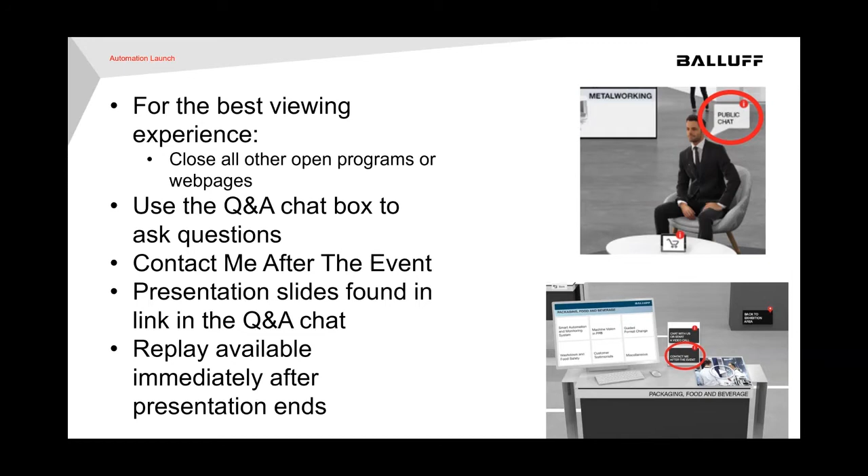Our presenters today are Wolfgang Kratzenberg and Logan Welch. Wolfgang is Balluff's technical sales specialist for RFID and traceability. Wolfgang has worked at Balluff for 8 years. He is an experienced sales and marketing specialist focused on RFID and barcode technology. Wolfgang assists in every phase of a traceability project, from idea to implementation. He has a passion for making a complex concept easier to understand and is focused on helping clients achieve their organizational objectives.

Our other presenter is Logan Welch, and Logan is Balluff's machine vision technical sales specialist. Logan Welch has more than 20 years of experience in industrial electricity, factory floor automation, automation sales, renewable energy design, and machine vision. He has held roles as a controls engineer, a territory vision/ID sales manager, and an engineering manager, among others, prior to joining Balluff's vision team. Logan prides himself on being a collaborative resource in any role he is in, and he is always passionate when talking about the benefits of Balluff's vision solutions.

Without further ado, I'm going to turn it over to Wolfgang, and then we'll get to Logan to finish the discussion. Please enjoy Driven by Data, the role of RFID and machine vision in assembly and production.

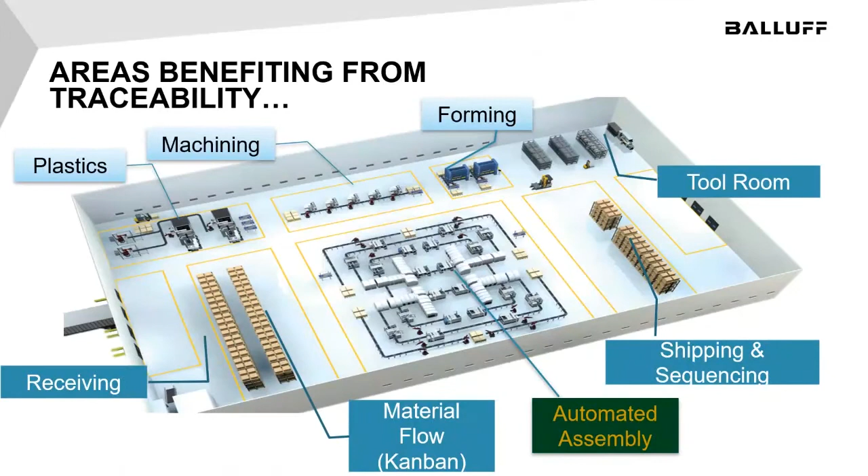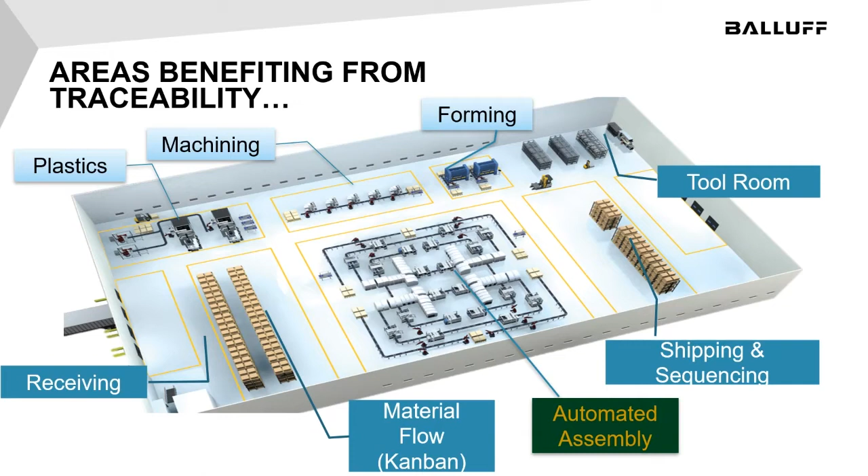And that's where it can get a little bit confusing, but realistically, once you hammer it all out, it's pretty straightforward and logical. So let's jump in here. So, you know, all the areas of a plant, and this could be any plant. This could be anything from an automotive plant to, you know, insert any industry plant here along the way. But for sure, a vertically integrated plant in one setting.

So let's just go across the top. You think about injection molding machines, anything in the plastics world, two-shot molding as well, machining centers, metal forming, meaning stamping, and then even when you put the tools away in the tool room, you have a location where the tools go when they're not in use. RFID has a role in all those areas.

And where would it play in the injection molding world? A mold is just a tool, right? Some tools are very small, some tools are very large. In this case, most injection molds are fairly large, and then the inserts that go into them are fairly small. But all of those things need to be tracked. And it's not just that they need to be tracked, but what information can you put on the tag, which goes on the mold itself, that can help you make decisions in the future.

And that's the key. Things like how many shots, that's a huge one in the injection molding world. In the machining world it's how much tool life a tool has left on it, right? So if I have a milling tool in there and I require 3 hours of work for that tool and it only has an hour rated of work life left, then I probably shouldn't be using that tool. I should go find one that has a longer life than 3 hours.

Metal forming, you think about these gigantic dies that go into very large presses. I've seen some big monsters out there, and what guys are doing is they'll put the tag on the actual die itself, and first and foremost, they're trying to make sure that they have the right die and the right press. You wouldn't believe how many times, or maybe you would, the wrong die gets put in for the wrong application, and shut height is off and all that. And what happens when that occurs is you have a crash, and a crash in a 600-ton press is something to reckon with.

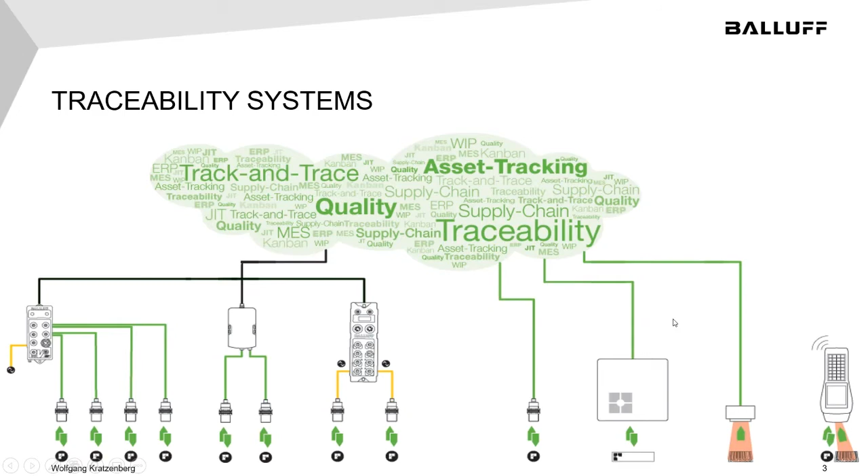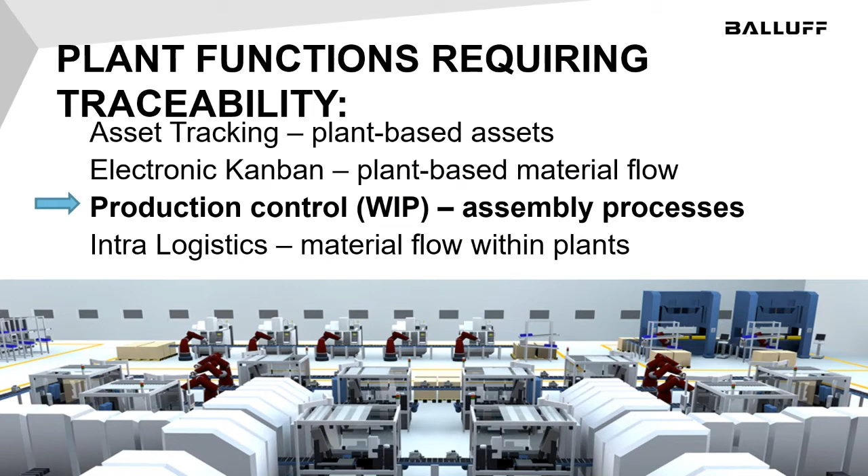And then, of course, there's barcode reading, and there's handheld barcode and RFID reading as well. So we're going to get into all this a little bit later here. So 4 major applications within a manufacturing plant, and it really just doesn't matter. Again, it can be manufacturing a vehicle, wafers for semiconductor, or medical devices for life sciences. Really, all of these things come into play.

There's always asset tracking, and these are plant-based assets. I'm not talking about your IT equipment and that kind of thing. We're talking about things that are required to build the product. What are the tools that are required? What are the change parts that are required when you do a changeover, when you change from making one part to another? Those are the assets that you need to be able to identify and locate when you need them.

RFID plays a major role in there, and it's no different than Kanban. Kanban actually comes from the automotive industry, but it's also used in just about every other industry out there, because at some point along the production line, if an operator stocks out of a part, you have to have a way to get it down to that operator so he can continue to build those parts. And then the one we're going to talk about mainly is production control. We'll go through that here shortly.

But another big one nowadays is intralogistics. A lot of people, when they think of RFID, they think of tracking shipping containers across the seas and stuff like that. But realistically, the major way that RFID is being used, more than most use cases, is tracking material. And this goes back to what I was saying about the raw materials as they come into a plant. Tracking those raw materials from start to finish.

Again, I need to know where that raw material is when I need it, because otherwise it's going to slow me down. And again, downtime is not a good thing. That's exactly what we're trying to eliminate in a production process.

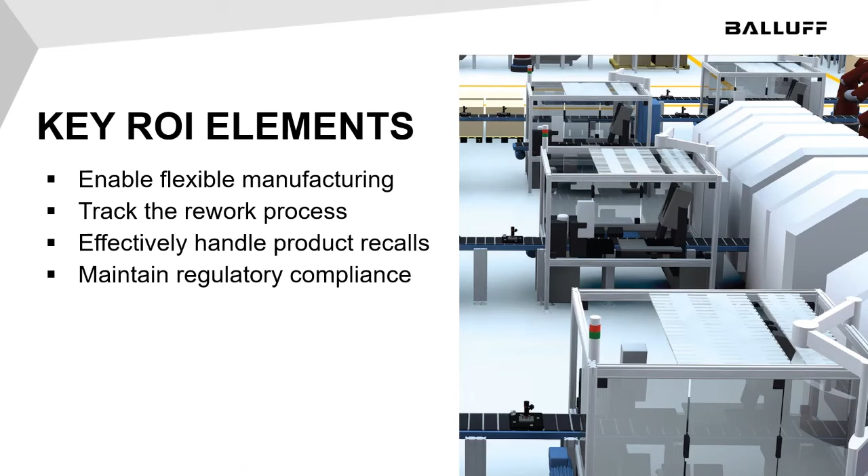And again, a big part of this is also maintaining regulatory compliance, making sure that I have traceability. I can say this is where this product started, this is where this product is, and this is where this product is going. That's the whole concept. RFID, barcode, and machine vision allow you to answer all those questions. It allows you to record that data, and you have a record of it in case you need to show that record.

So this is what I was really talking about before. Everybody knows we should be driven by data, right? It doesn't matter if it's in our personal lives or anything else. As smart humans, we need to make decisions based on real, reliable data. That goes without saying, I think. But so what is the data? What kind of data is being written to an RFID tag?

In some cases, people think, well, I write a 4-digit number on there, and that gives me full traceability. I scrub it against a database. It tells me exactly what that product is, et cetera. That's fine, and that's absolutely a way to establish traceability, and that's usually an entry-level way to do it. But because of our tag size, and because of how RFID in general has evolved, especially over the last decade, we have the ability to write a ton of information to these RFID tags.

And the question that constantly gets asked of me is, what are people writing to the tag? Because, like I said before, there's an evolution happening where it's not just barcode or RFID, it's a combination of both. The people who are familiar with barcode understand that you're just reading a few-digit number, and you're scrubbing that against a database.

Again, with an RFID tag, they don't realize how much information. You can write a story on that RFID tag if you wanted to, up to 128 kilobytes, which doesn't sound like a lot in the world of PCs, where we are nowadays. But the reality, that's like 64 pages of text, right? So that's a lot of information, and I'll talk about where that can be used here shortly.

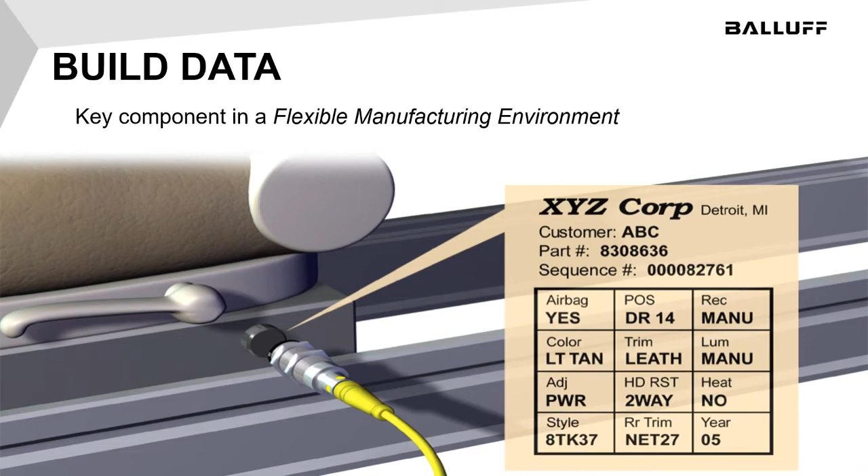But think about the problems that you run into if you don't have the ability to do that. Let's just say you had a problem at station 2 and you're going all the way to 50 stations. If you had a problem at station 2 and you don't find out about that problem until you get to station 50, there's a major problem, because all 50 of the products behind that one bad product could have something wrong with them as well.

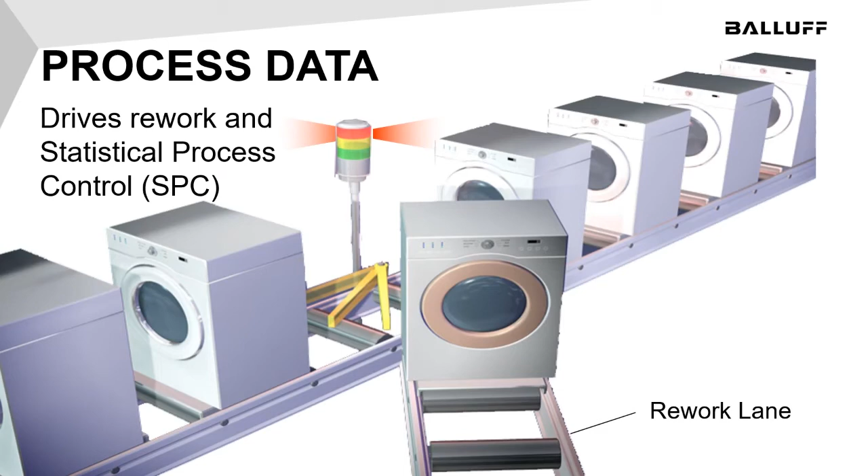So if I can identify the problem immediately and then take action, I'm at a huge advantage. Otherwise, I have all the time and resources that I've put into a product that's eventually either going to go to scrap or have to go to rework at the end of the line. So again, it's about updating that data real time and making real time decisions along the production line.

So lineage data, and this is the one I mentioned, the romaine lettuce example, but this is just a case of a simple fuel injector. And a dozen parts that we've identified here that we put barcodes on, and that little animation there was essentially what customers are doing in a case where they can't do full item level tracking with RFID, because let's face it, you're not going to get an RFID tag on that little red O-ring there at the bottom of the fuel injector. It's just not going to happen.

So what customers are doing, they'll put individual barcodes on each individual part, and they can read those barcodes as it's being built. That barcode number can be written to the RFID tag, and now you have a part that sits on the pallet, and it doesn't have to sit on the pallet for that matter, but in this case it does. That big 90-degree shape you have in the middle is an RFID tag.

The information is written to that RFID tag. So instead of having to go up and read each individual barcode to identify all the parts on the fuel injector, I can walk up, read the RFID tag, and it tells me every single component that is on that specific item on that pallet. And again, you may have 4 or 5 different suppliers for each one of those parts. That's a reality. A single source supplier is rare. So if you have a recall, you need to know specifically where that part came from.

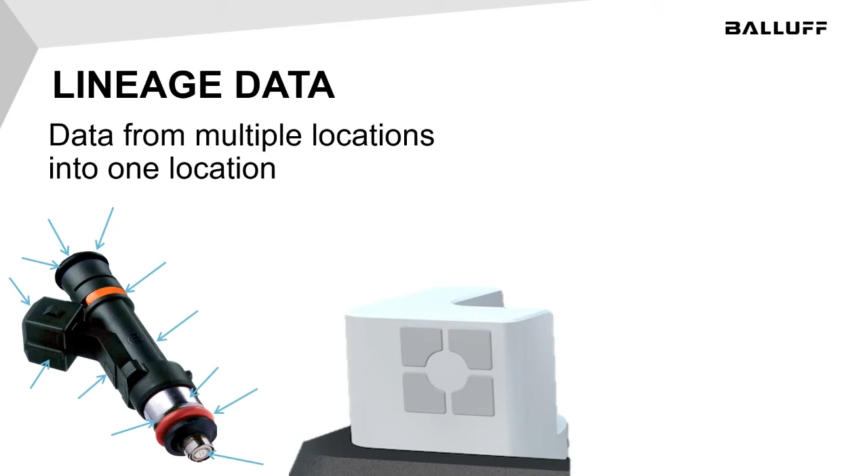So a couple of different tracking options, and I mentioned this briefly, is that not everybody builds on pallets. It's just as simple as that. And in many companies, if they can avoid building on pallets, of course, that's just another asset to track, and they'll avoid it. But we can do it either way. Again, that's something that we've built a lot of modifications based on the fact that we have a specific customer that doesn't want to use a pallet. Well, therefore, you're not going to put a tag on a pallet, but we can put the tag directly on the part itself as well.

It's definitely something that we pride ourselves in here at Balluff, is we're willing to produce an application-specific modification that fits your application if it makes sense.

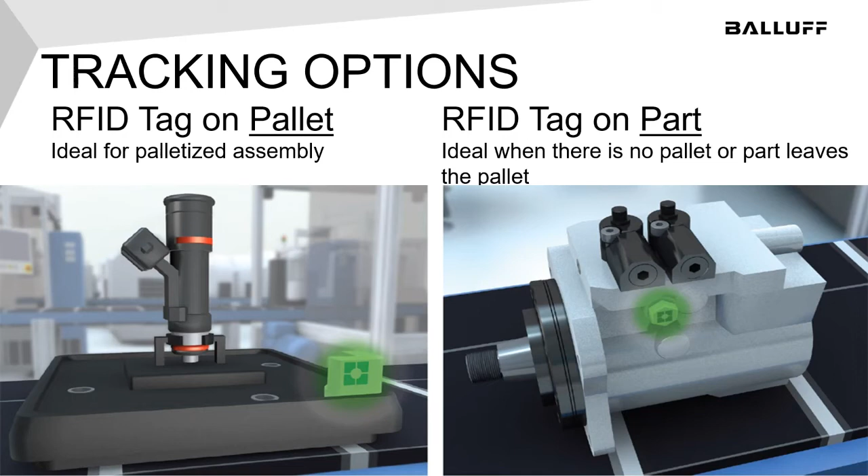So again, the tag can be on the pallet, it can be on the part, it can be on the carrier in some cases. I've seen cases where they've utilized RFID in paint shops, and they didn't want to paint the actual tag that was on the part or cause a spot on the painted object to not be painted, so they'll hang the tag on the actual carrier that's going through the paint shop, and you identify that tag that's on the carrier as opposed to a tag on the actual item itself. So a lot of different ways to do it.

So again, 2 ways to do this. There's thousands of ways in the end. I could say 2 or 2,000 different ways to address an application that involves automatic data collection in general. Basically, from a read and write standpoint, you have a fixed reader or a handheld reader. And again, it's about what fits your application. The good thing is that we can do both, and that's the key to keep in mind.

The benefit of a fixed read, obviously, is that it's truly automated, right? No one has to pull the trigger to get a read. So it's true automation. The tag passes in front of the reader, the reader reads the tag, and the information is transferred. And once again, you don't have to depend on an operator in some cases to align the reader to the tag. So if it's a fixed reader, I don't have to worry about someone walking over and reading the wrong tag. Now the handheld side of it offers the mobility to do that.

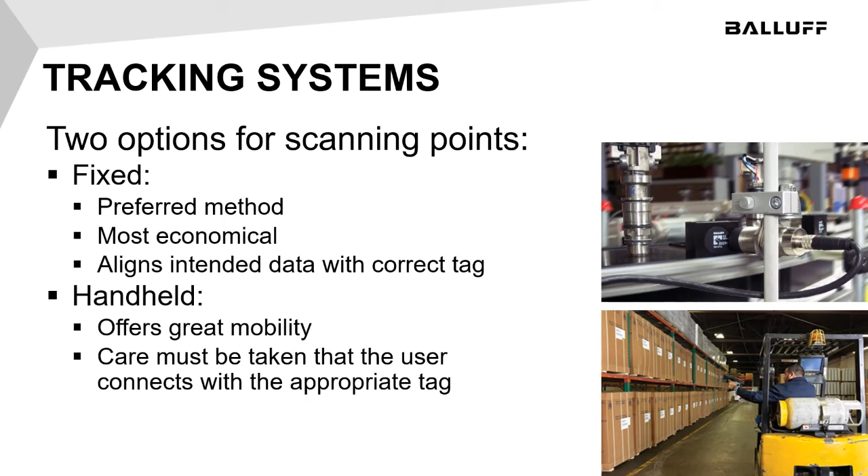So let's say you have a production line and you have to pull whatever it may be, 10, 15 parts off that line to do a special run for a customer. Well, after you get done with that special run and it's time to put those other parts back on, I have to be able to identify what station each of those parts was in, right? So if I know something was at station 1, 2, 3, 4, 5, etc., I can put it exactly back on the production line where it was. I don't have to investigate and do research to figure out where to put it, because all that time I'm investigating is downtime, and that's not good.

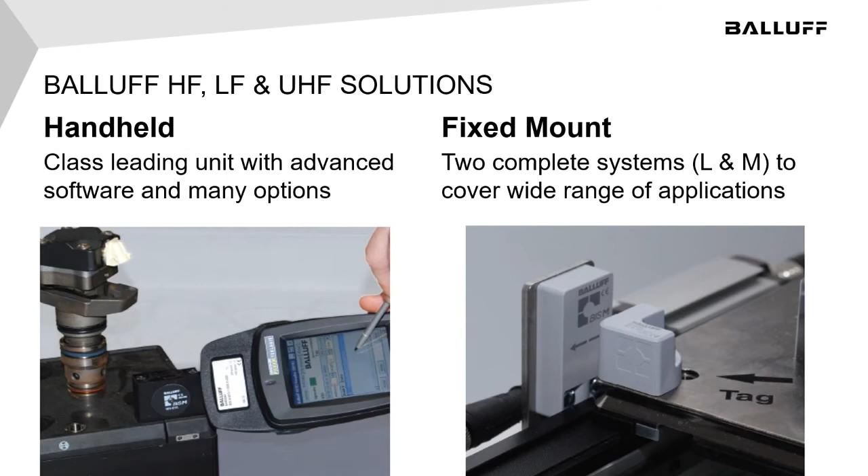So again, handheld, fixed mount. From a handheld standpoint, we can do LF, HF, and UHF. Fixed mount side of things, the same way. Low frequency, high frequency, and ultra high frequency, and there's benefits to each of those. I'm not going to get into the details of the technology today, but there's a time and place for every single one of those technologies. And that's really what gives us a huge advantage in the market, is that we have a lot of different ways to address a lot of different applications.

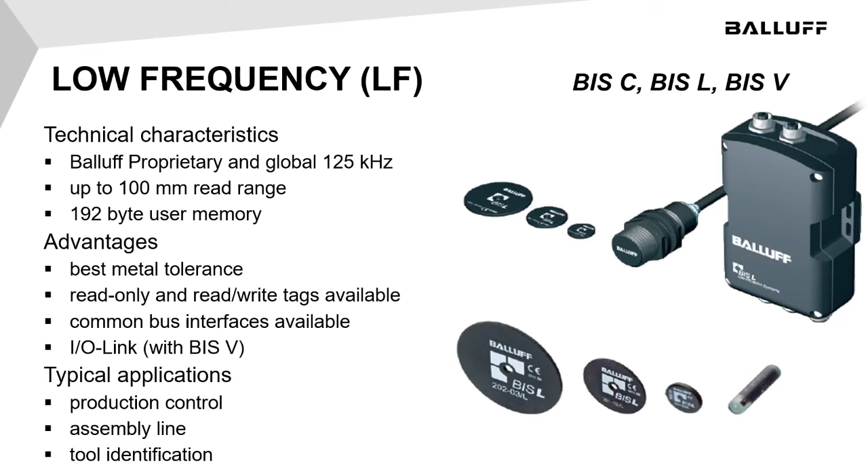Low frequency, as I mentioned, performs very, very well in a heavy metal environment, meaning you can actually bury the tags flush mount down in metal and get very good read range. Something you give up with low frequency is a smaller memory available, right? So up to 192 bytes, which to some is plenty of memory to do whatever fits the process. But once you get to the high frequency side, it allows you a whole lot more flexibility when it comes to memory size. You actually go up to 128 kilobytes, as I mentioned before.

So a big part of it is, do I use one frequency over the other? The key here, and I'll say this 100 more times maybe, is that it's what fits your application. You really don't have to inundate yourself with the ins and outs and the bits and the bytes until you have to. Allow us to use our experience to explain why we would choose one frequency over the other.

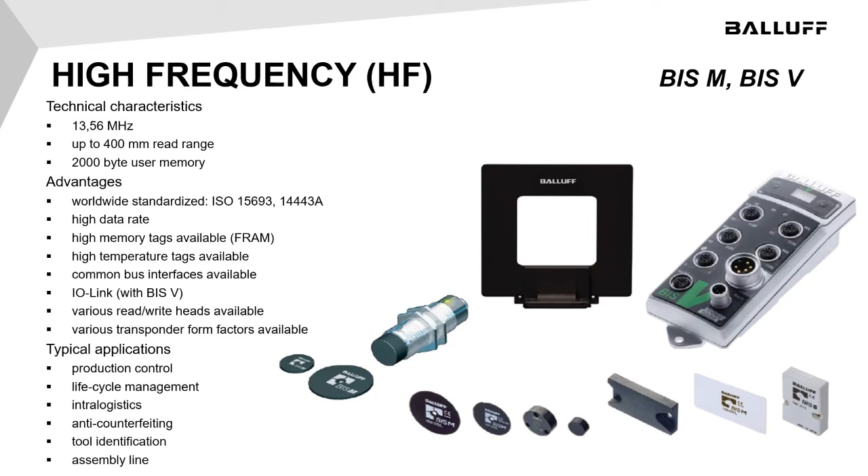And then the ultra high frequency. I put these three slides on here for a reason, because I have seen an evolution over the last decade from that really short range, a couple millimeter read range maximum, to a lot of customers saying, well, I've heard of UHF and I want to take advantage of those long read ranges, which is fantastic, because the benefit of a flexible read range is that now I can run multiple size products on one production line, which is what we're all trying to do nowadays.

But again, there's benefits to when you would use UHF, because if I have to have a ton of memory, if I want to write all that quality data, if I want to take images from my camera and combine them with an RFID tag and be able to transfer that data quickly, again, all these things must be taken into consideration.

And a big one is environment for UHF. And again, it's not that they don't perform well in a specific environment. It's just that in, let's just say, a heavy metal environment, a lot of metal around, beams, etc., one of the things to take into consideration is UHF performs differently around metal than HF or LF does. It's just physics.

In general, it's two different types of coupling that's used. UHF uses electromagnetic backscatter. High frequency and low frequency use inductive coupling. So they have a different way of addressing the application from a physics standpoint. So again, there's a time and place for all the different frequencies.

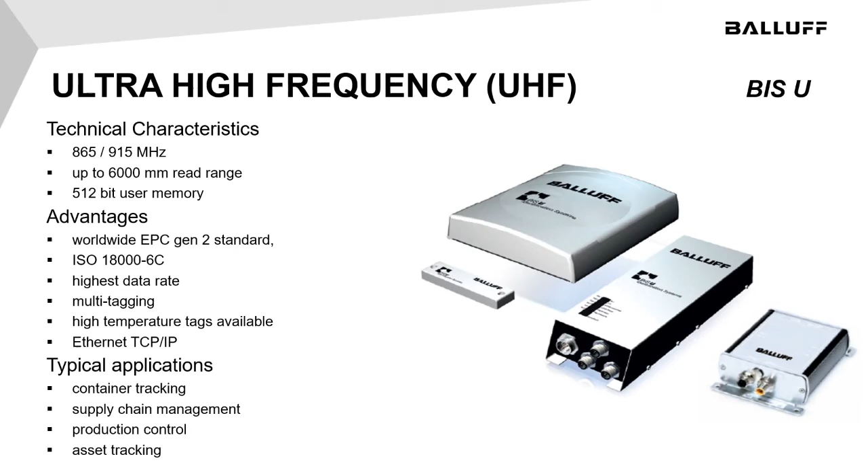So I mentioned this earlier. I alluded to the fact that there's a certain group of information that we need to make a decision when it comes down to which system to use, which system to recommend, what's going to be best fit for the application. And these are the big ones right here. And maybe you could even just go from the bottom to the top. I think all my tech guys would agree that the environment plays the most important role.

With RFID, I'm not going to read through metal. I'm not going to read through liquid. It's as simple as that. Now, Balluff has a system that's actually optimized to read while the tag is on metal, but it's not going to read through metal. That's a physics limitation, not a limitation of Balluff. So again, it's very, very important.

So to say, hey, this tag with this reader gets, let's just say, 3 feet in the case of a UHF, that's not always reliable to look at in a spec sheet and say, well, yeah, I'm going to get 3 feet whether I'm in a laboratory or I'm on the production line. It's not the case. It's critical to know what that environment is like.

And going back to the top of the list here is throughput. How much data and how fast do I need to read? In some manufacturing processes, the product comes into a station and it sits there for, let's just say, 5 minutes. You can read a ton of data in 5 minutes. That's not going to be a problem. But if it's a dynamic application where the production line is moving all the time, now we have to know how much data and how fast do you want to write that.

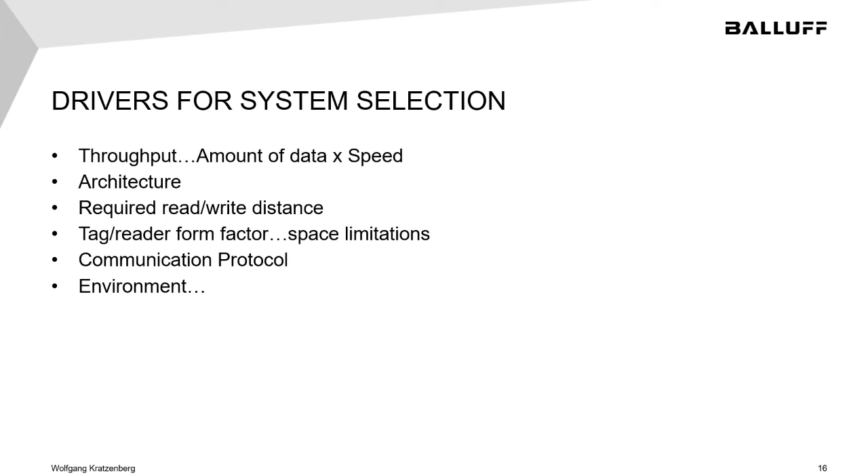And finally, the communication protocol. When it comes to the controls platform that Balluff interacts with, we're agnostic in that world. So you think about EtherNet/IP, PROFINET, PROFIBUS, EtherCAT, CC-Link, even TCP/IP, RS-232. We do all that, and that's critically important because that adds flexibility and scalability to your data collection.

So RFID architecture, and I mentioned this, depending on your line architecture and all those other drivers, we would choose a system based on that.

And these are our 3 most popular systems here. So, IO-Link, if you've not heard about that, you will very soon. Usually IO-Link is used in a case where you have very low data requirements and it's just standard speed. It's not a high speed production line where things are zipping down the line and happening really quickly. Usually it's just, I have a license plate of data, maybe 4 or 5 bytes of data, and it's coming through at a standard speed.

And you can put an RFID reader alongside all your smart lights, your measurement devices, your standard sensors, et cetera. And I'll show you an example of that here shortly. And then our multi-frequency system. We can actually put LF, HF, and UHF all in one processor. In addition, there's an IO-Link master port on there to add like a smart light or an indicator light, or even put like an 8 port hub off there that I have standard IO in. Again, it all comes down to your specific architecture on your production line, and we can match the RFID architecture to go along with it.

One of our most popular systems lately is the all-in-one system. And again, this is designed for high-speed, high-memory applications. It's a very simple system to use. There's 3 ports on the bottom of that reader, and I'll show you an example here shortly. When you want to expand that reader from 1 to 2 to 3 to 100, it's literally just daisy chaining is all it is.

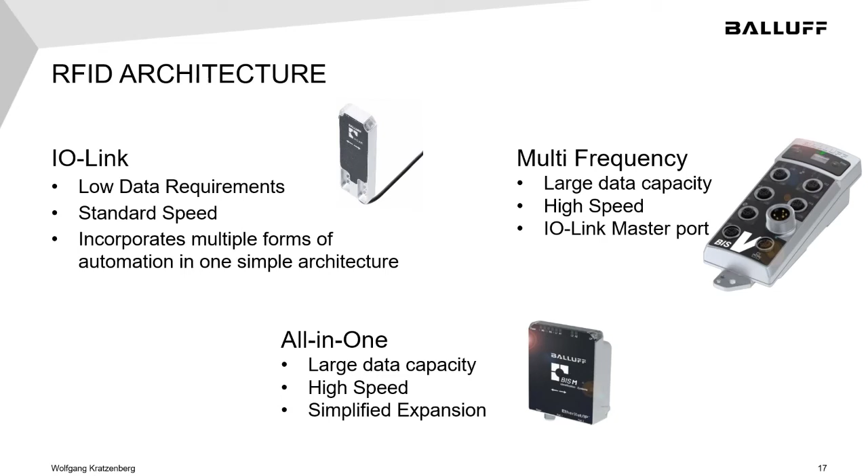Very simple concept. So going back to the IO-Link concept and the IO-Link architecture, the thing in the middle is an IO-Link master block, and that master block can accept devices of all sorts, right? So whether it be a linear transducer, an indicator light, a smart light, RFID heads, of course, all these different things can be put into one master block. So you have sensors operating through the same block that you do RFID heads.

You have an inductive coupling device that can actually transfer power from one device to another without touching, right? So in a case where you have your high density plugs that have all these little pins that break off all the time, you can actually have non-contact power sent through that air gap, and even rotary tables, you think about that. But all these things can be plugged in to one IO-Link master device.

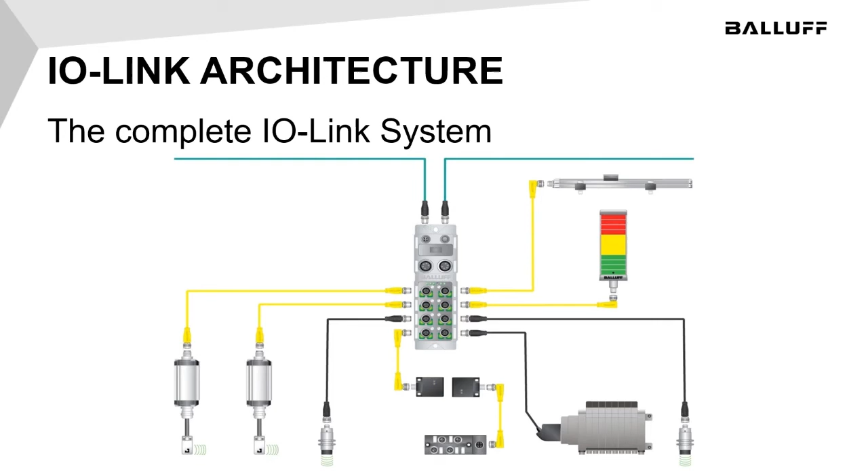So the BIS V platform, as I mentioned earlier, we can do UHF, we can do LF, we can do HF, and talk all these different communication protocols all in one device. And the advantage of that is eliminating the number of parts and pieces that you have in your plant, and eliminating the number of part numbers, and having the flexibility to standardize on one processor and put multiple frequencies in multiple areas of your plant.

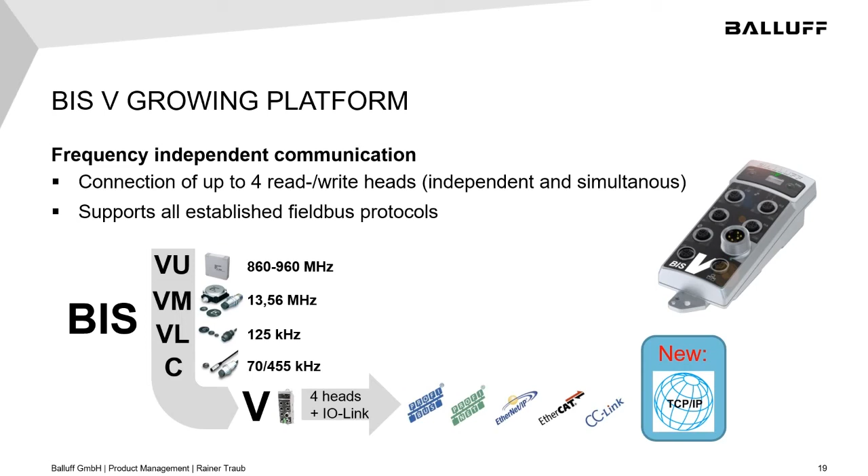And some people say, well, where would you do that? A big part of that is the machining process. In some cases they'll have low frequency tags buried in the side of a tool holder, and in that low frequency tag, you write offset information about the tool. And then as that part would come out of the machining center, the transfer process usually is HF, or high frequency. So there's maybe two different tags involved, but it's no matter because I can read it with the same processor.

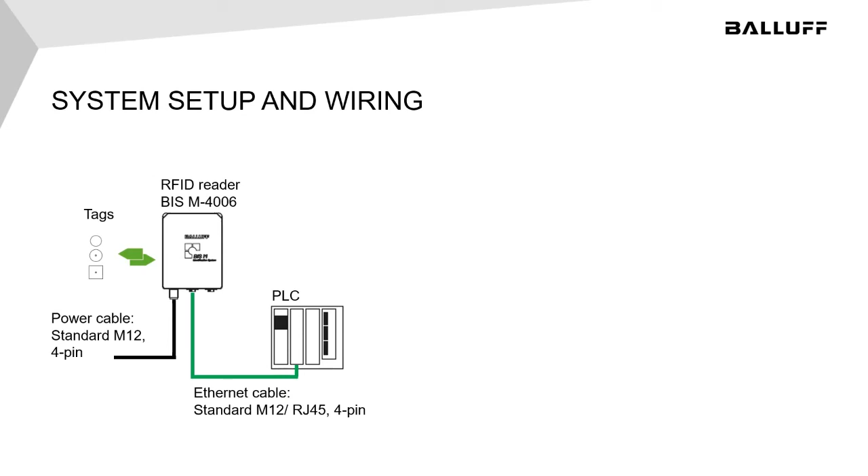So the all-in-one system, and again, this is available in PROFINET and EtherNet/IP, but a very simple concept. Like I mentioned, there's a power port, and then there's a two-port switch also built into this one compact RFID reader, and it's just a direct connection to the PLC. So in a case where you wanted to expand, very simple expansion, you literally just add power to each individual RFID read-write head, and then you connect a network cable from one to another.

And this is big in automation, where you've probably seen single cell robot cells that expand greatly over time. This is really a system where I'm seeing this being used, or what we call islands of automation, where you have a very manual process for a majority of the production cycle, and then you have some automation that happens in between there. And that's usually where this is used, because it's very easily expandable.

A lot of our customers will start off with one reader and expand to 25 over a period of a year and a half. Because of the way they build out their production line, you can allow for traceability all along that process, and it's very simple to expand.